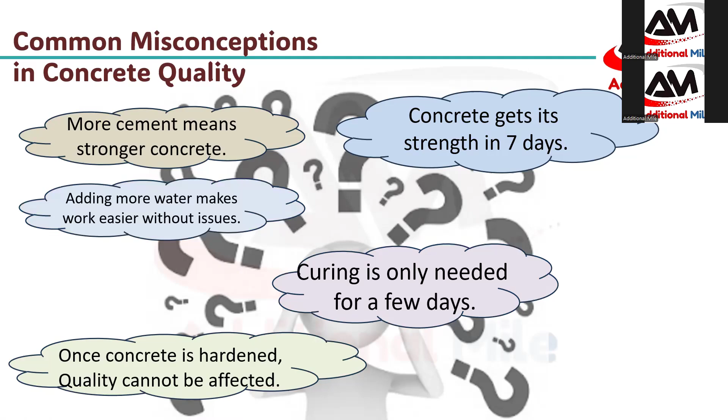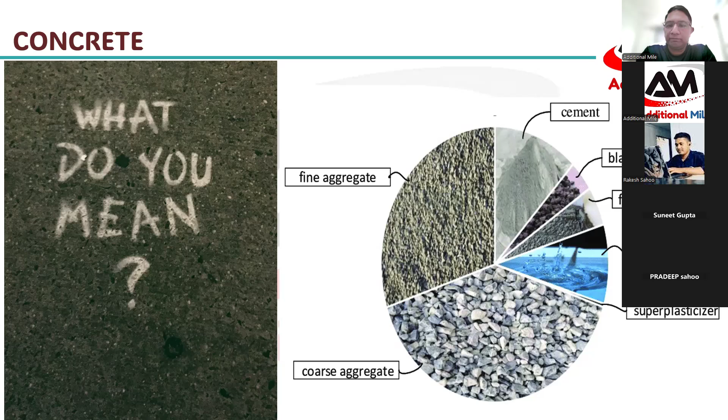So, before starting our regular presentation, let us have a very quick question session. Like, what is concrete, or what do you know? What is concrete, can anyone tell? Let us make this session as interactive as possible, so that there will be knowledge sharing as well as many things even we can learn by ourselves. So can anyone quickly confirm, just quickly, quick answers, question answers - what do you mean by concrete? Suneet, Pradeep, yeah - mix of all the ingredients, what has been shown on the picture. Okay, okay, other than that - because as the subject says, quality of concrete beyond mix design and cube testing, right? So let us understand beyond the box, out of the box - what do you understand by, what do you mean by concrete?

Mr. Rakesh, are you there? Pradeep? I could hear only Suneet.

Material which gives you toughness, hardness, strength in the structure.

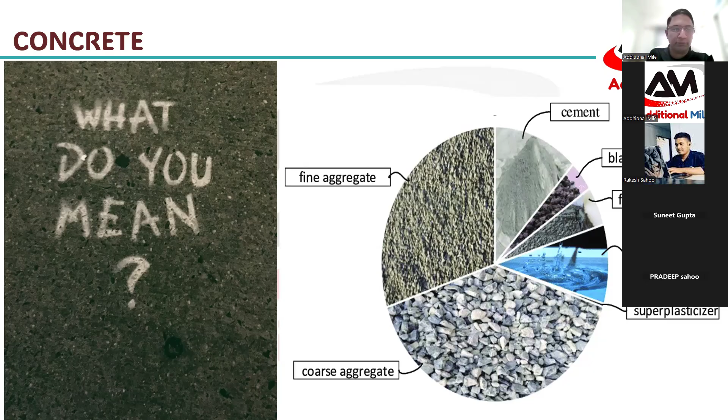As per my opinion, concrete is nothing but a heterogeneous mix of various ingredients which is designed for durability, strength, to achieve specific shape and designed purpose. Is that sounds logical?

Correct. So concrete is nothing but a heterogeneous mixture of various ingredients, which is designed for durability, strength, and to achieve the specific shape and purpose of the designer.

As for this, is there any other questions you want to ask, or shall we move ahead? I think we can keep the questions in the end, sir. No, questions in the end is very easy, but I want all people to interact, because I know it's a Saturday and many people will have their own assignments to do, or many are on site. So I just don't want them to join the Zoom and keep it aside. That's my intention. Anyway, the last 10-15 minutes will be a question session.

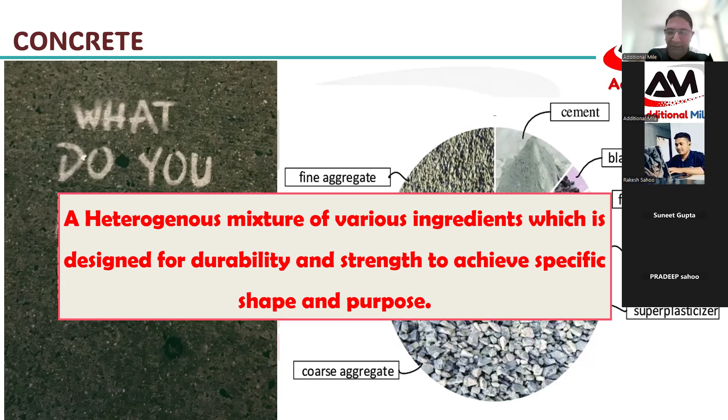Okay, fine. So let us go to the next chart. Common misconceptions in concrete quality. So what are the common misconceptions in concrete quality?

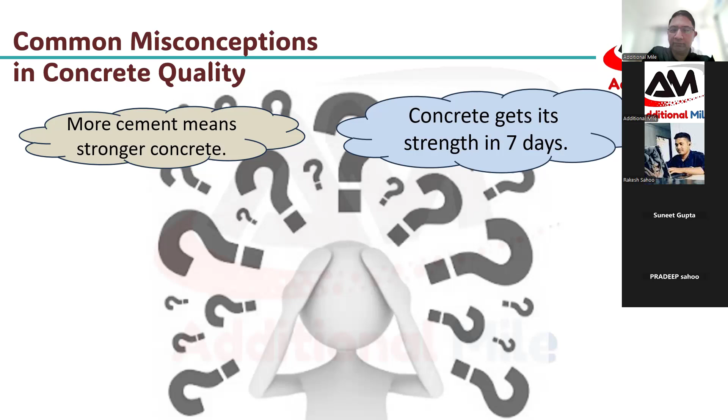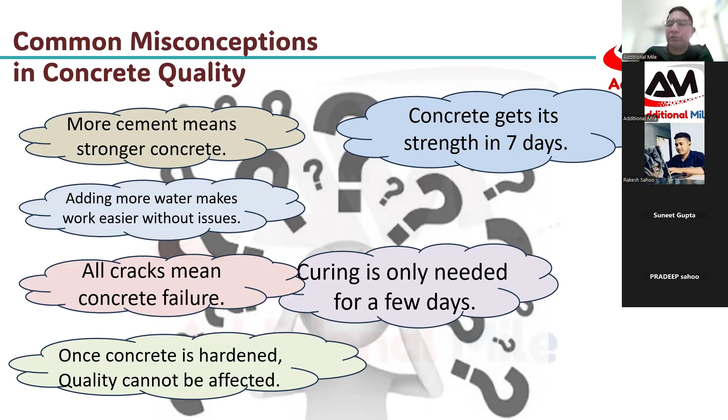One, more cement means stronger concrete. Concrete gets its strength in 7 days. Once concrete is hardened, it cannot be affected. Curing is only needed for a few days, not more than that. Adding more water makes workability easier. All cracks mean concrete failure - any kind of cracks, people by default conclude there is a failure in concrete. All structures need the same type of formwork. And last, strength equals durability. These are the common misconceptions in a project, generally management things.

But is it true? Is it true? Now let us go one by one.

Concrete strength depends on the correct proportion of cement, water, and its ingredients. If excess cement increases, that will directly result in shrinkage. It almost generates high heat of hydration and may cause cracks. Now, may cause cracks means it all depends upon other factors.

And also many times we see the high cement content will reduce the durability of the concrete. Durability means long-term performance of the concrete.

Same way, another misconception is that concrete gets its strength in 7 days. Concrete reaches about 60 to 70% of its potential strength in 7 days, not 100%, as per practical results.

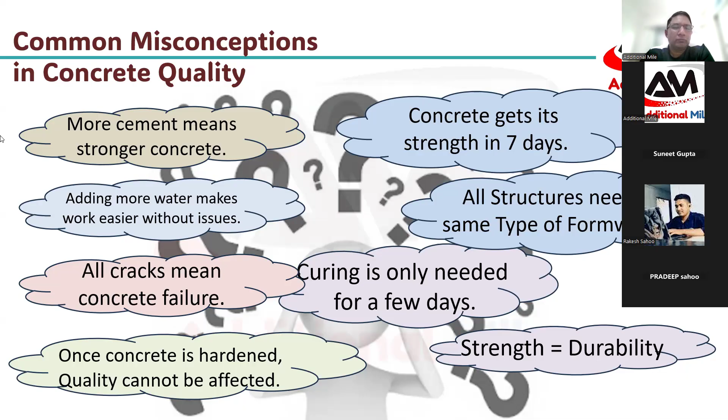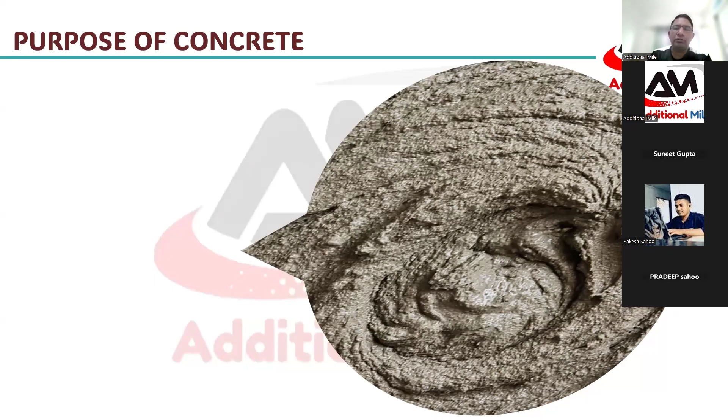Breaking down this purpose further: structural support, obviously, because it has to support the structures that are going to load on it, like column, beam, slab, foundation - that is anyway there. Or other things kept on it, for example tanks, water tanks, fluid tanks - in petrochemical plants there are huge tanks kept on it. That is structural support. Next is durability and longevity - if you want to protect anything from chemicals, weather, fire, dampness, or water, it is designed for that.

Then the next purpose, fire. Concrete is inherently fire resistant, maintaining its structural integrity at high temperature. We frequently use concrete liners, like in boilers. You might have seen steel structures carrying hot or cold fluid, what we call freeze and thaw. To avoid direct thermal attack, they construct a concrete barrier around them. Then the basic concept getting more popular nowadays is called sustainability.

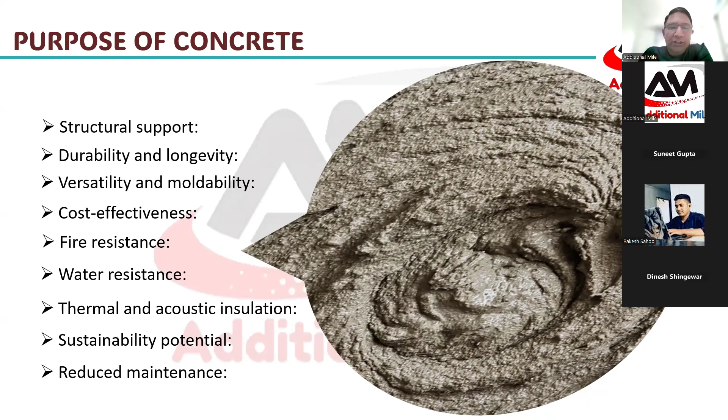Then comes how concrete behaves. Concrete behavior is not only depending on mix proportion, but there are multiple factors, such as shape. Shape also affects, for example, if there are sharp edges, they are often exposed to damage at the edges or damage to the shape. So shape of the concrete, even if you see in dams or a bridge on the river, will have different shapes of pier or columns. Same way, the shapes of concrete differ as per their usage.

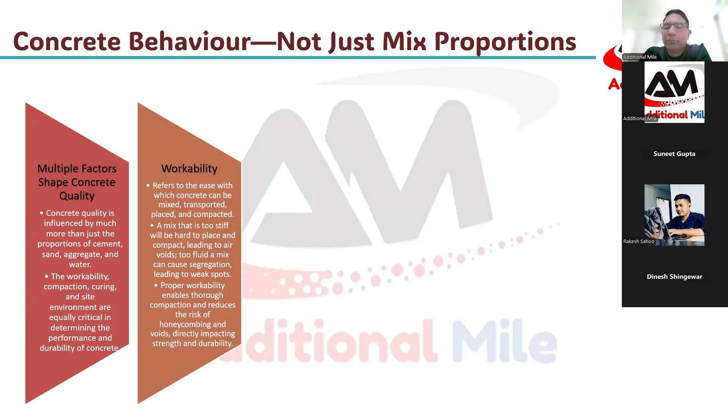Next is workability. You cannot use the same slump for all concretes. You have to use less slump for foundations, a flowable concrete for confined spaces, and a moderate slump or workability for slabs and beams. So workability also influences the behavior of the concrete. Then compaction, the percentage of compaction, the type of compaction. Inadequate compaction always leaves air voids, and once we open the shutter we come to know there are honeycombs due to poor compaction, or high compaction or over compaction also leads to segregation of the aggregate from the slurry.

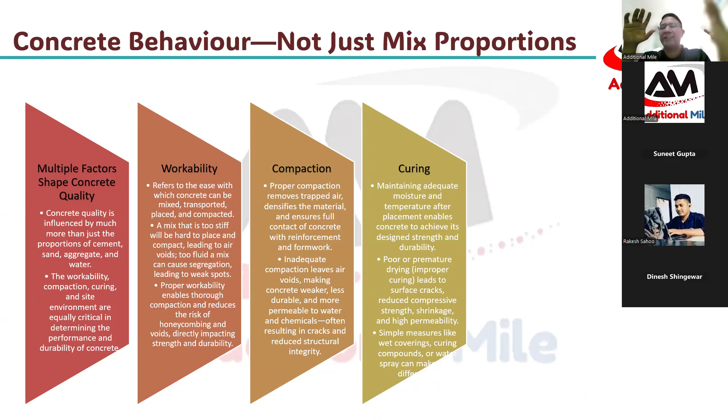Next comes curing. As I told you earlier, poor curing or poor methods of curing also affects the concrete. For example, if on-time curing is not ensured, it will affect it. Or if you cure only certain faces and leave the backside or a side face inaccessible and uncured, that also affects the concrete to some extent.

Next is site environment. This means too much windy, too much humid areas like Mumbai or Chennai, or hot weather like Rajasthan, Kota. I spent my early career in Kota, where the ambient temperature goes up to 50 degrees. I also had a chance to work in Mangalore, where the humidity touches up to 90%. In Mumbai and Chennai, the humidity level goes up to 94, 95%. I don't know how many people here are from Mumbai, except I think Dinesh. He's from Mumbai. So the humid temperature, hot temperature, and cold weather all affect the concrete behavior.

And last but not the least, a perfect mix can also fail. How come you say that? A perfect mix can also fail. As I told you, it is not only about the mix proportion, it is also about bad practices, human intervention, and human error.

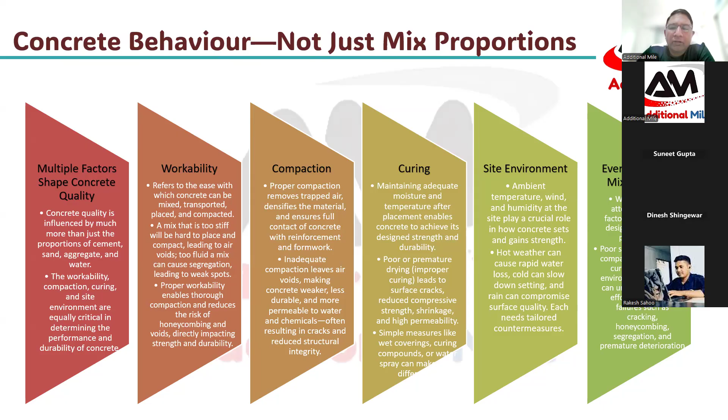Regarding this wax base and water base, we have done lots of assessment on our project. What we observed is that with wax base curing compound, while doing finishing activity, you need to strike off the layer before finishing. That is one of the most challenges we have faced.

So we have gone for the water base. In water base, you do not need to strike off the layer, as I explained, it will start removing or peeling off after 10-15 days. So by my side, it is advisable to go for water base always.

It can save one of the activities. If your structure has a coating above it, you don't have to go with wax base, because wax base is always difficult to remove or peel. Water base is always recommended for structures which have a coating above it.

But for underground structures like plinth beams, which don't need any coating above, you can go ahead with wax base there, because there is always moisture available underground which will affect the surface of the concrete. We don't know what kind of moisture it is - it may have chemicals or sulfates which will affect the concrete surface. So wax base will have additional protection on the concrete.

Generally it is common practice nowadays. In one of my projects, we had gone with a bituminous coating - forget about the curing compound - we directly did a bituminous coating to avoid any interaction between soil and the underground structure. So wax base is one of the common and affordable ways to go.

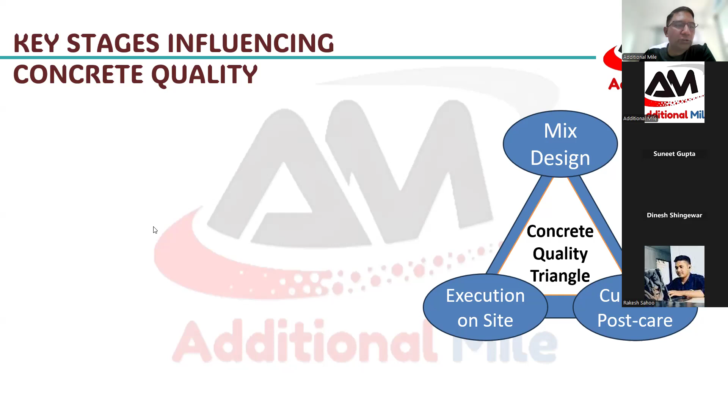Let us come back to the topic where we were. The internal factors affecting concrete behavior or influencing concrete quality is material selection. As we know, any wrong selection of raw material will affect the concrete mix. Then comes mixing - batching and mixing.

We all know there are two types of mixers available in the market, and a third is manual mixing. The two types of mixers are drum mixing and batch mixing. Drum mixing is where the drum rotates vertically, and batch mix is where the drum rotates horizontally. Though the mixing pattern looks the same, there are pros and cons in every kind of mix.

So it is always suggested to go with batch mix. Why? Batch mix always resembles manual mixing. I'm using this comparison because, though it's an old tradition in India which we don't recommend nowadays, manual mixing was a controlled mixing ensured by a supervisor or engineer standing there, witnessing and supervising it.

So horizontal mixing or batch mixing always resembles horizontal manual mixing, and that is why we always ensure a horizontal mix is always a better mix compared to vertical.

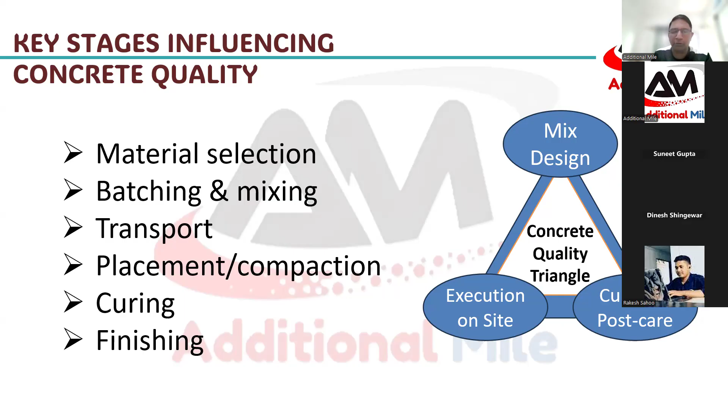Regarding this finishing and compaction - a floater is recommended for finishing and compaction. How well is it? A floater is always recommended for flat surfaces. It doesn't vibrate or pull the slurry up - it only takes the surface slurry or surface material for its finishing.

No, why I'm asking is because we were discussing the floater with our contractor, since we are getting too many cracks on the surface of a recently cast slab.

To avoid shrinkage cracks that come on recent slabs, we were discussing procuring a floater machine. Nowadays you can get floater dia from 450 to 600mm, minimum dia, so it can go into the smallest area you can capture, along with the smallest dia.

We were discussing that the challenge is the floater has to be used after some time of finishing, once the concrete sets, I guess after 30 to 45 minutes. At least 2 to 3 hours for the surface to get a little bit floatable and harden, and only after that we can use the floater.

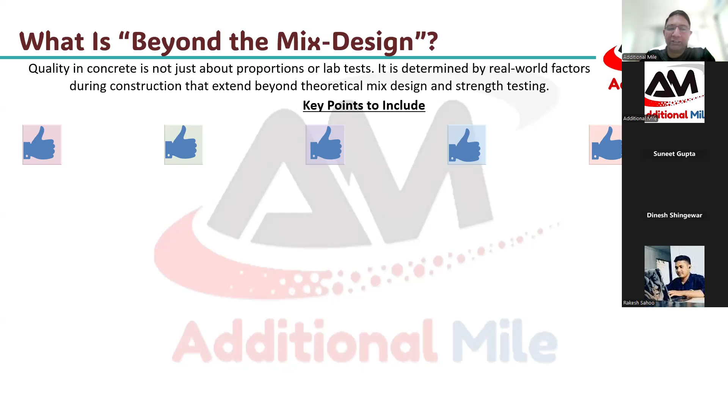As we discussed, concrete has its own behavior, which other factors are influencing. We also discussed the workmanship, the minor mistakes or minor challenges or minor negligencies which can also affect the concrete quality.

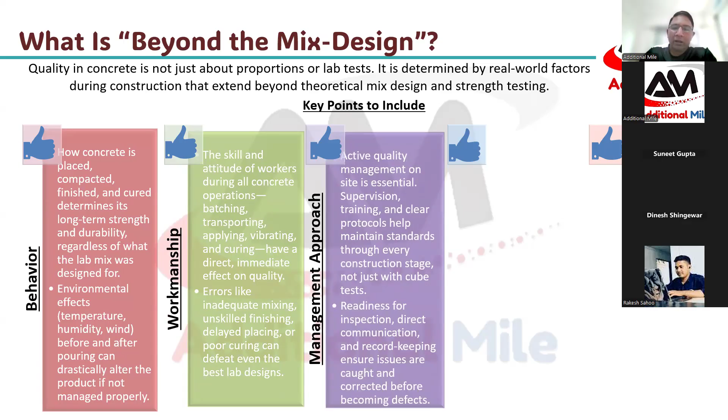Here comes the catch, the management approach. When it comes to a management approach, how serious is your management towards maintaining the quality? When I say management, it starts from a supervisor, not only an MD or a CEO of the company. It starts from the supervisor.

So quality management is as essential as project management. Proper supervision, proper training, and proper method statement, maintaining the standards at every stage. Not just, 'I produced it, I sent it, my job is done.' No, it's not like that.

After producing, even this applies to RMCs also. RMC's duty is not just producing and sending the concrete. It is always to take end-to-end responsibility of the concrete. I have produced it, it is my responsibility to check whether the client is also maintaining the quality for pouring. Otherwise, there is no use of my production, my efforts for concrete production.

Okay, then I will produce the concrete, but what about readiness? Is the structure ready for receiving the concrete? In my experience, I have seen so many projects where my CM or PM used to call me and say, send the concrete, don't worry about whether it is ready or not. That should not be the approach, right? You should be 100% ready to receive the concrete.

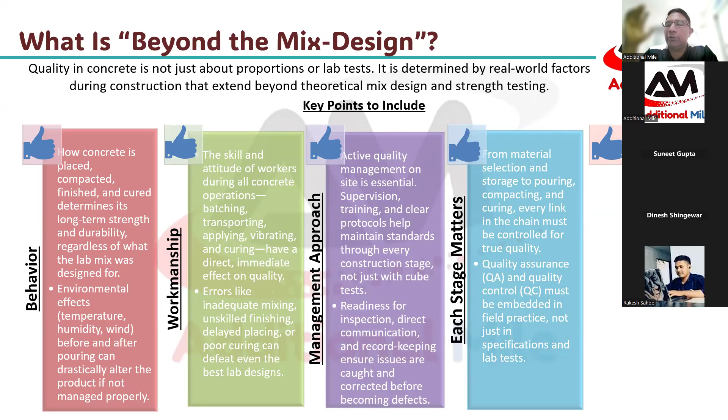The good quality control engineer should be awake at site to keep checking from the day of mixing, day of reinforcement, day of formwork, till the 28 days of the concrete is over. Even after that it matters with other factors, but standard factor says 28 days is our baby's incubation period. We should take care with all kinds of care.

And last is the very common problems - keep surveillance on cracks, honeycombing, scaling, weak spots. Weak spots - one of the ITC projects in Mumbai, I was called by... I was working in BKC, and exactly opposite to that there was an ITC hotel project going on, and I was called by the site engineer there at that time to just check the problem.

The column was not set for 3 days, even after opening the shutter. The finger was making a fingerprint, a finger punch point inside. And when we went into the curing tank, the cubes had almost vanished, washed out due to a mixing issue or whatever the reason was. We came to know the reason later, but at first it was very difficult to investigate why the concrete was not set. If someone had neglected it or not notified it on time, we could have ended up in a disaster.

So for such kind of things, we must have proper vigilance. As I told you, the incubation period is 28 days till handover.

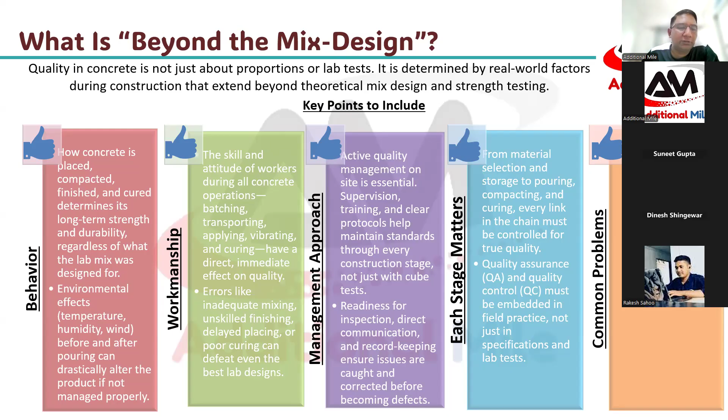Now, what are the common field problems? These are, as I told you, part of a holistic approach. Now we will go into common field problems. We see cracking,

segregation, where the material separates due to excess water, maybe, okay, sometimes a very high height drop, mishandling in the sense someone has added water, someone has done excess vibration. Sometimes I see people do heavy vibration in slab work also. Come on, a slab is hardly 150 to 200 or 250 thick, you don't need heavy vibration there. But still people do heavy vibration just to ensure a factor of safety. So we should refrain from such things, because the more you vibrate, the aggregate will settle down and slurry will wash away. That is also a part of segregation.

Honeycombing, obviously, as I mentioned, is due to low vibration or improper formwork filling. The gaps in the formwork, most of the time we reuse the form plates or formwork sheets, and we always forget to plug the tie rod holes, which allows the slurry to go out and honeycomb happens. Sometimes with excessive vibration, slurry goes to one side and aggregate settles on the other side.

Scaling and spalling, as I told you, happen due to excessive tamping and finishing on the floor. After some days we can see surface peeling, or we always call it flaking. Or sometimes in very hot regions, concrete sets very fast before even doing proper vibration. So those lumps remain there, and once the load comes on, it gets cracked.

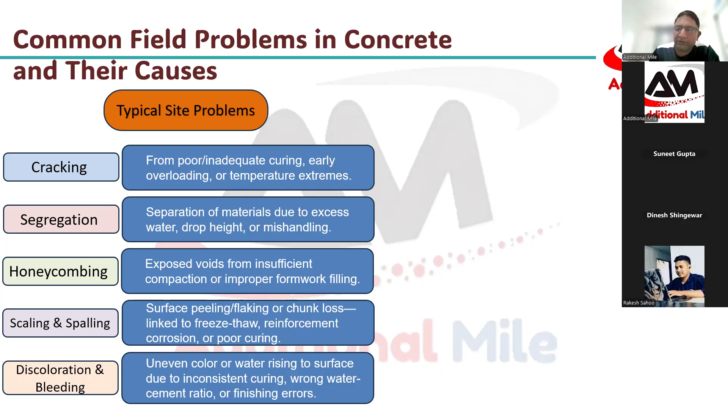So for all these areas, what root causes do we observe? Improper curing, poor compaction, and some mix issues. Mix issues in the sense, as I told you, aggregates are from different sources, cements are from different sources, or, as we just discussed, different types of admixtures and different types of curing compounds are used.

Sometimes, I'll tell you, a wax based curing compound was what I was recommending to one of my clients, and the client was unfortunately a bit financially or budget oriented. He used a water based curing compound, and he added water to it, and he diluted it.

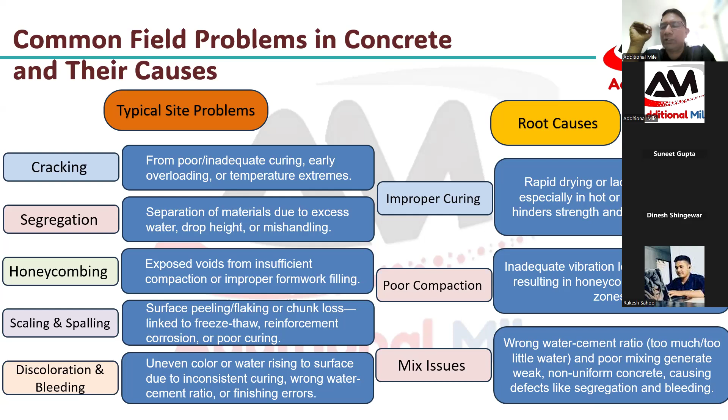He diluted the curing compound and applied it. Obviously it will not work, and it stopped performing. After a few days, he could see the entire curing compound had washed away. To save money, he diluted the water and started doing manual watering instead. See the negligence of this person. This kind of thing we should avoid.

Now, what are the interventions in quality? Intervention is an unwanted interference in the concrete quality. I see some people have joined recently. Can you put light? What is your opinion on what are the interferences or interventions in concrete quality? What do you understand by interference or interventions in concrete quality? Anyone?

Don't worry, we are on time. So...

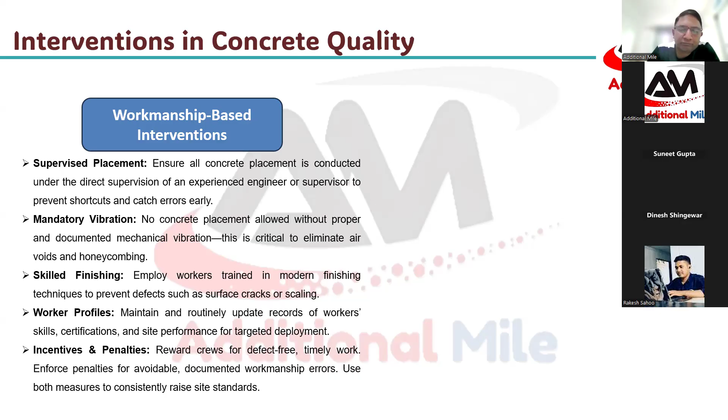Nowadays ICI and ACI India chapters and others are awarding best concrete projects and best concrete structures. Recently, Bangalore International Airport bagged the best concrete structure award from ICI. These rewards and recognitions matter a lot. When you get such small awards or recognitions from external agencies, you feel overwhelmed and energetic, and you perform better. So you should always intervene before things go wrong.

Next is management based intervention, where senior management interferes to improve the quality. What are the management improvement interventions here? Develop a proper PQP, project quality plan, and a proper pour plan - where to start, when to end, what should be the rate of pour, what should be the mixing ratio, how much deviation is allowed in transit time, and how to mitigate harsh weather.

The last and very important thing is culture of quality. The management should introduce the culture of quality - not only on paper. They should bring training sessions and trainers from outside.

I have recently given training in around 5 to 6 projects, and they were very happy. It was not because of my efforts, but because of their own management's interest to educate their workers, engineers, and supervisors towards quality. Everyone knows how the cube is cast, but very few know why the cube is cast. That gives clear information and seriousness about what quality is and why it's so important.

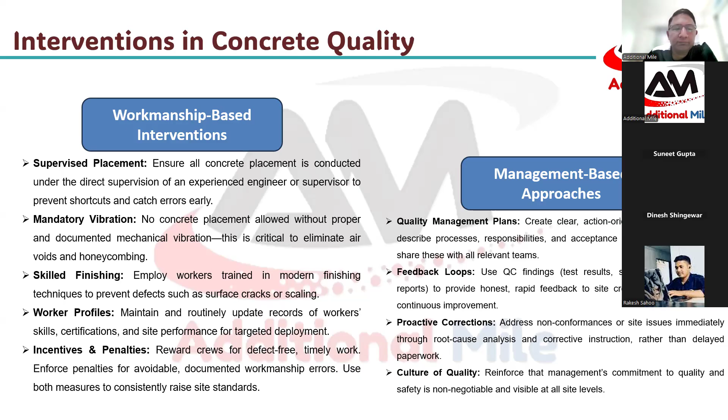So far so good, I believe. Now we have understood how the approach should be. But what is the roadmap? How can it be achieved?

One is proactive approach. What are the proactive approaches? Check the concrete before pouring - a pre-concrete checklist, like plumb and everything. Then when the concrete is done, proactively go yourself and check for any cracks, voids, honeycombing, or segregation. This is proactive work by the concrete supervisors or formwork team.

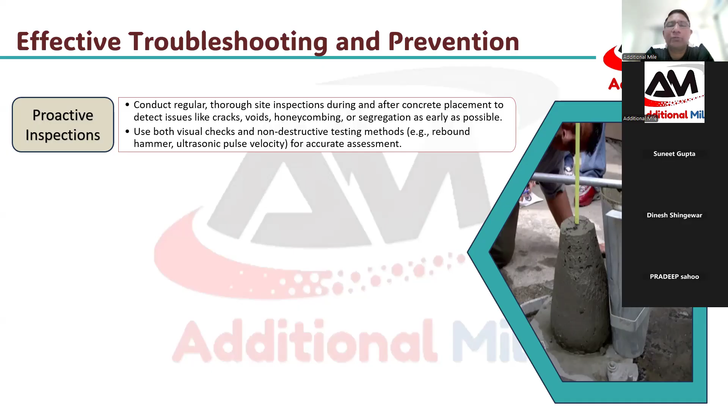Early identification means identifying issues before someone else raises the red flag. You should set your own timeline and inspection period - the moment de-shuttering happens, I should be there. The moment someone unwraps the Hessian cloth after curing, I should be there to check. That kind of early identification.

Swift action: the moment you see honeycombing, I don't recommend immediate repair, but address the issues with proper consultation with experts. As we all know, there are three types of honeycombs - major, minor, and severe.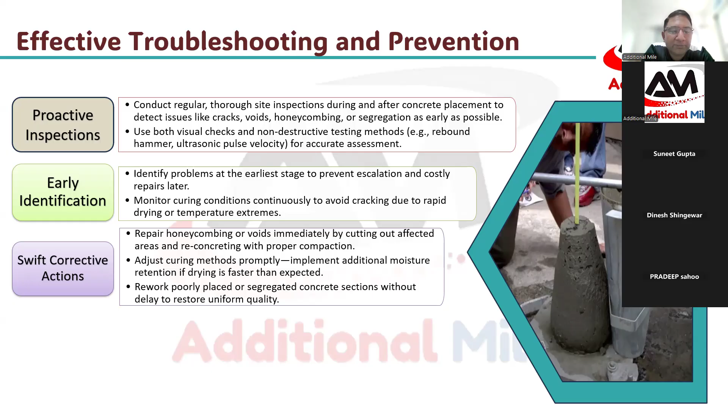Record what all you have found, record all the corrections you have done, record the conformities and non-conformities, and record the trainings you have undergone on specialized activities. This will help you do a lessons learned session at the end of the project, which will also help the next generation or next team identify and have control at early stages.

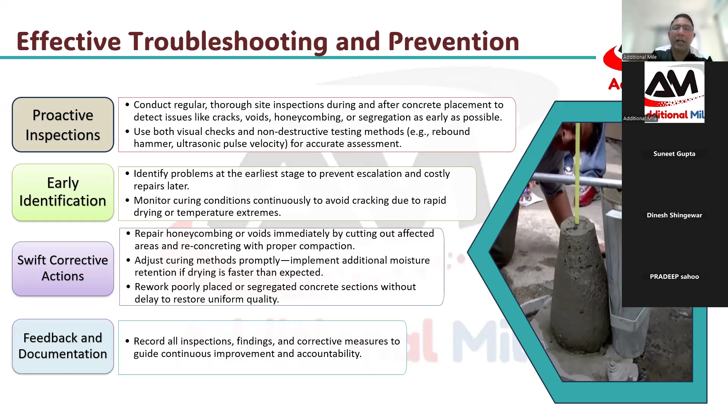Now let us come to the part where we left earlier, which I think I have already explained: strength versus durability. What is the difference between durability and strength? In the first slide itself I addressed this, but for the new joinees I'll reiterate. Concrete strength is not directly durability. Concrete durability is not strength. Strength is a part of durability.

Durability always has factors such as freeze-thaw cycle, temperature, chemical attacks, sulfate attacks, carbonation - these are all factors. So concrete strength is not directly durability. As I told you, this is a misconception - please come out of it.

For decades, people assumed that high strength automatically means durable concrete, which is not the fact. In fact, many researchers and even writers like Adam Neville and M.S. Shetty have clearly stated that cube strength does not guarantee resistance to real site exposures with chemicals or temperature - two different things.

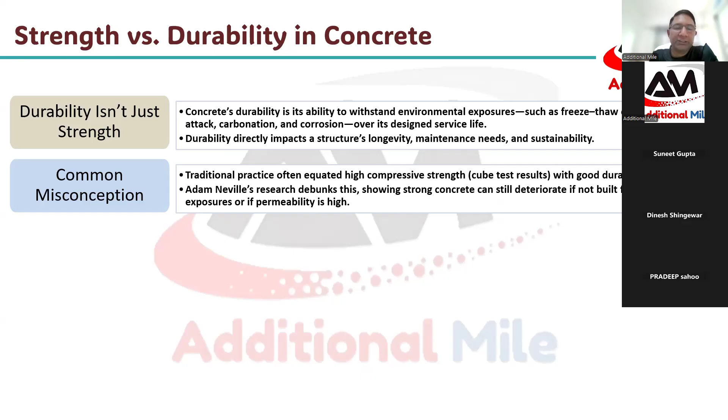Role of water in water cement ratio. As I explained, there's a question about reusing water and also the quality of water. As I told you, once you use and recycle the water, that will have certain carbonations or certain ground chemicals which may be harmful for the concrete. So we should refrain from selecting untreated water.

If you have restrictions to use groundwater, please get it tested with proper IS code for construction water for concrete structures. That test is already available at the NABL labs. Please get it tested for water suitability for concrete structures or usage in concrete.

Then, exposure based on design. No shirt will fit for all - you should always select the shirt which fits you. Same way, one concrete mix design will not fit everywhere in all aspects, so we have to design with the exposure quality.

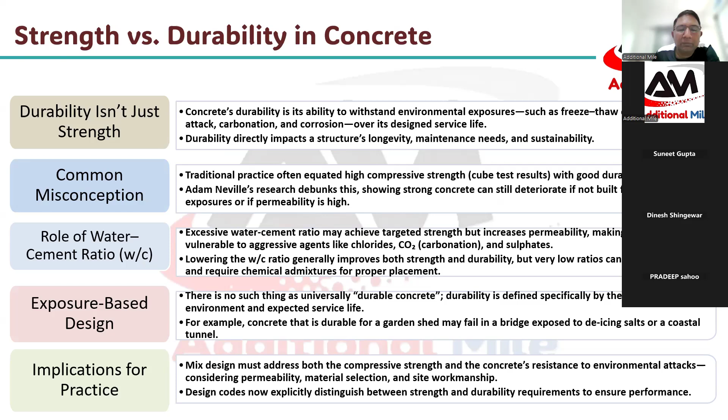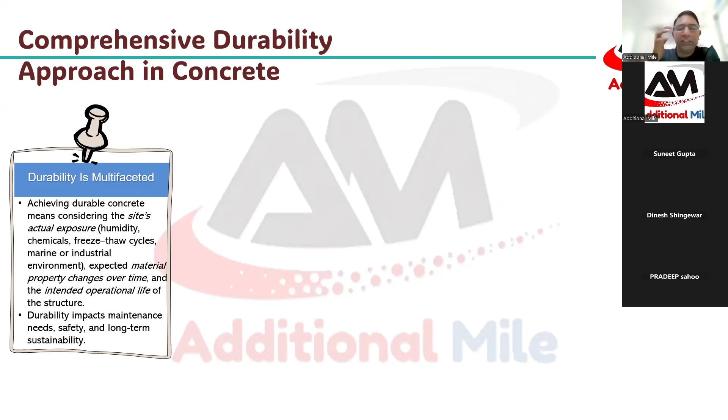Next, durability approach. Nowadays there is so much talk happening around durability and sustainability. Let us quickly go through what this durability approach in concrete means. As I explained, concrete should be designed considering parameters like temperature, climatic parameters, geographical parameters - whether you're constructing near an industry, in hilly areas with cold climatic weather, or in a humid area - that matters.

Then, mix design to match the real exposure. As I told you, the structural design as well as the concrete mix design should ensure suitability for conditions like coastal weather or aggressive industrial chemicals.

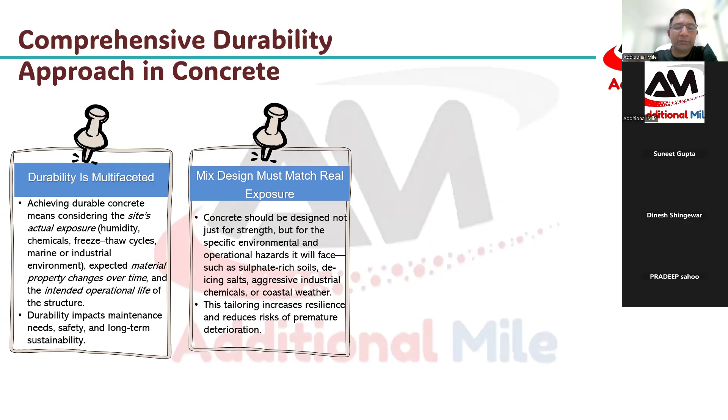Supplementary cementitious materials like fly ash, GGBS, silica fume will ensure resistance of the concrete towards sulfate. Most of the time GGBS is considered the best sulfate resistant material, whereas fly ash is recommended for reducing permeability in concrete. It is such a fine material that it avoids unnecessary or forced water entry into the concrete, making the concrete very controlled and less permeable.

And last is improving the resistance to sulfate and chemical attack. As I told you, introducing this kind of additives will reduce the permeability of the concrete, right?

Using SCM. Now what is this SCM? As I explained earlier, it is supplementary cementitious materials like fly ash, GGBS. They are very powerful tools because they are finer than the cement, which will go and plug the concrete pores inside, controlling the permeability, which will improve the resistance to sulfate and chemical attack - essential in industrial areas and sulfate-prone underground structures.

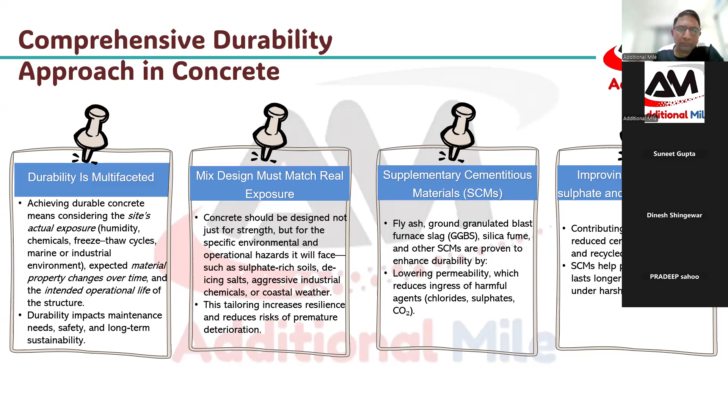So far so good, I believe. Parallelly, there is a huge word nowadays going around - sustainability, in addition to durability. Now what is sustainability?

As we discussed, using recycled material. But it is not only using recycled material, it is also using low lead time, or low lead duration or distance for shifting materials. As per LEED sustainability rules or policy, recently the Bangalore International Airport has bagged platinum status in sustainable and LEED green initiative. Platinum is the highest award given for sustainable materials used in a construction.

So I'm working with Bangalore International Airport. The airport is recently awarded platinum certification. Platinum in the sense, the primary rule is that any material we are importing or shifting should be within 350 kilometers from the project area. Plus, you should ensure the maximum material, almost every material or every part of the structure, should be used for recycled content.

Then what makes concrete not green or non-sustainable? Because the cement itself emits 8% of global CO2 emission, which is very high. And that is how the green initiative has come in, and they are planning alternatives to cement, or reducing the cement content by adding waste materials.

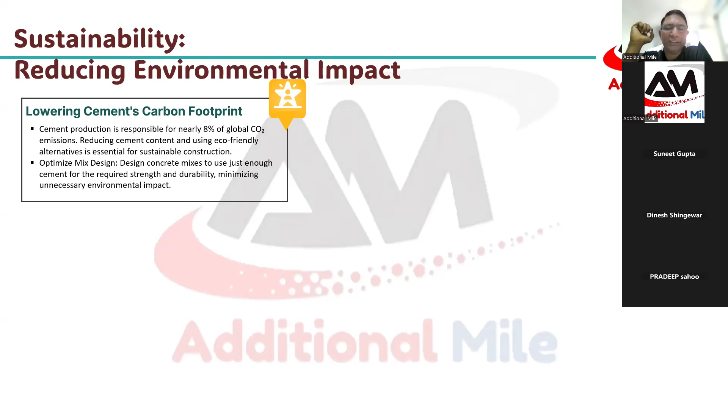Other alternative is geopolymers. Geopolymers use byproducts instead of Portland cement.

So you might have heard about EcoDrain. That is a company which has come out with manufacturing ready-made drains, small surface drains. They use geopolymer concrete, which gives a mirror finish, molded concrete, and surface to match any kind of shape you want. Near Bangalore, there is a place called Hosur, where Alto Precast is there. They use geopolymer concrete for manufacturing crash barriers for roads or any kind of barriers designed by government or local road government - in this case, the Tamil Nadu government.

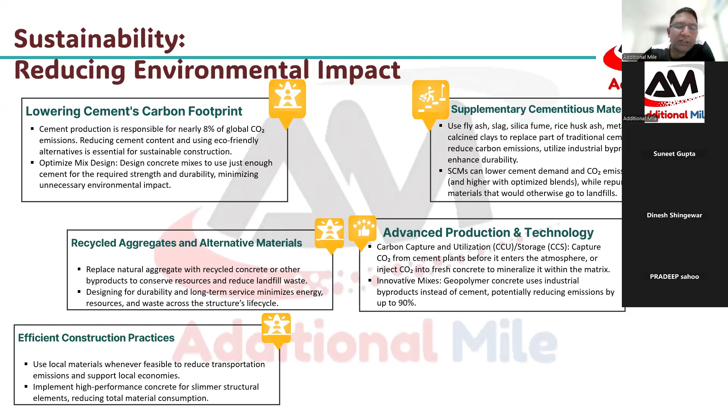So the government is also putting interest in using these geopolymers, which right now is a man-made product, man-made chemical, with low cement - almost zero cement, just as a binder content, no strength requirement from it. Plus we are not depending on natural resources that will get over soon, or any quarry or something. So there is no fear of raising the price due to shortage in the market. But yes, it has to be designed carefully because it is a man-designed product, suitably designed for a specific intent.

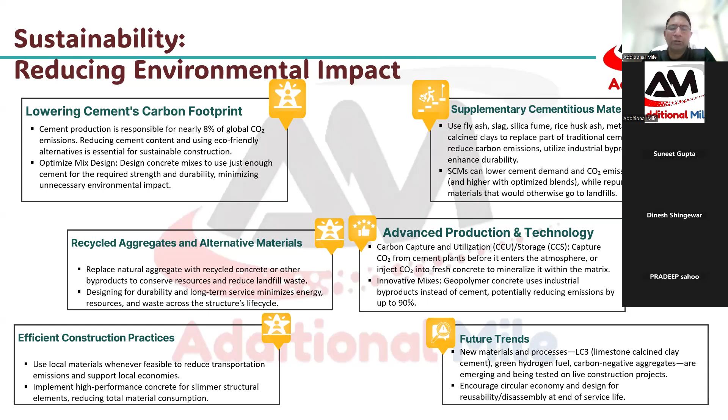As we know, this SCM - supplementary cementitious material - can be replaced up to 20 to 30% of cement content, whereas geopolymers contribute 90% replacement of cement nowadays. And recently, in the fifth revision, they have allowed 40% to 50% GGBS in PQC or cement structures used for infra works. That is also a good initiative by government to reduce cement content.

Everything we are discussing today is related to workmanship or a proactive approach towards reducing our efforts. Now, how to do prevention over repair? Before repair only, we should prevent the happenings. What can we do? We can ensure early inspection so that the concrete is not set fully. So any kind of repair, the bonding will be ensured. Otherwise, once the concrete gets hard, it is very difficult and costly affair to break.

Safety audit before handing over, safety audit before concrete placing on a slab. Please do the proper inspection of each and every staging, scaffolding, to avoid any kind of mishaps. Recently, there have been Instagram or YouTube videos where the concrete failed when people were standing and pouring concrete on a slab. So we should early detect and inspect the staging and scaffolding from an expert point of view, not by yourself. The designer should come and check whether everything is okay as per design. Then you should pour the concrete.

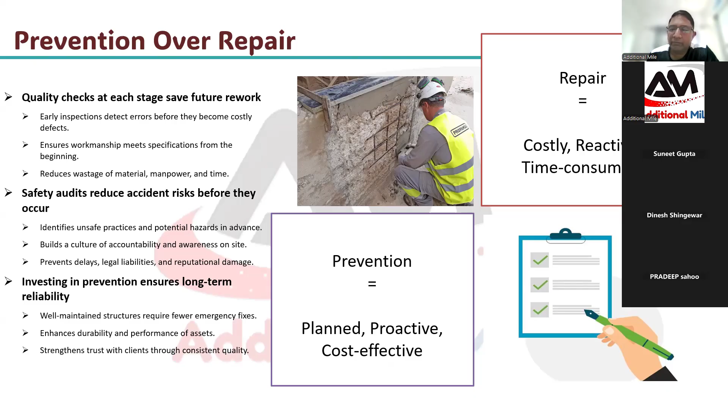So what are the takeaways? Quality of concrete is more than a mix design, because even the best designed mix will fail if workmanship and site practices are poor. Embrace technology and training: use sophisticated tools like digital QC systems, ensure proper inspection, and keep your workforce trained on best practices and skills.

Third, make quality everyone's baby, meaning everyone should own it. If your construction manager or supervisor is checking the pour, he should not rush for concrete. He should also take ownership of the concrete as if it were his own proprietary material. So the liability lies from engineers, managers, CEOs, owners, all the way down to the workers.

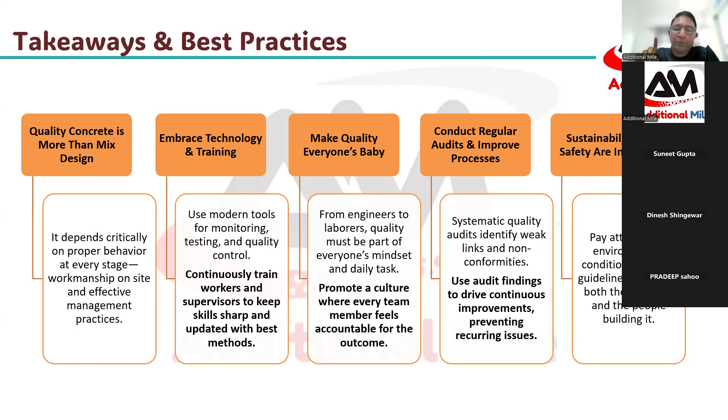And remember, concrete does not forgive mistakes. It only hides until it comes on the surface. Our role is to prevent issues before they demand repair. Now to the last slide.

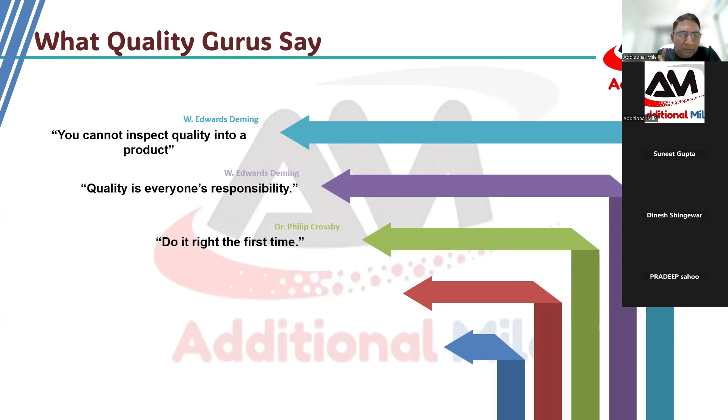Let us go through some keywords by our quality gurus. Mr. Edwards Deming, please read his books and his 14 principles. They are excellent. He always says, you cannot inspect quality into a product. It is an overall system. Quality is everyone's responsibility. Again, Sir Edwards Deming. Philip Crosby: do it right the first time. There is no second time.

The bitterness of poor quality remains long after the sweetness of low price or early time is forgotten. No one will remember who built it. No one will remember how fast they built it. Everyone will see and remember the present condition of the structure or element, and how good it was built.

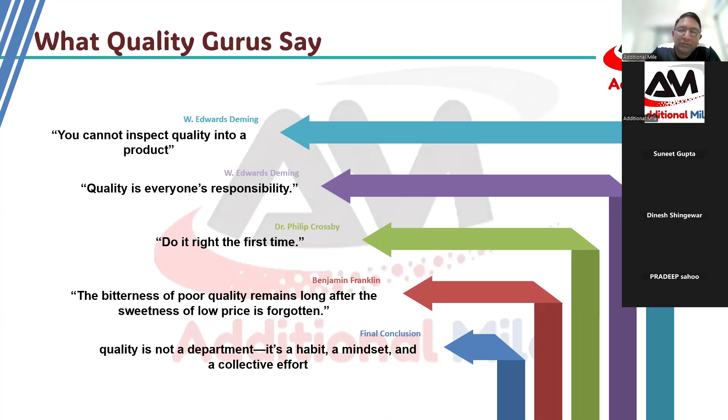This is a final conclusion, which is my personal opinion. Quality is not a department, it's a habit, it's a mindset, and a collective effort towards accomplishment of a successful project.

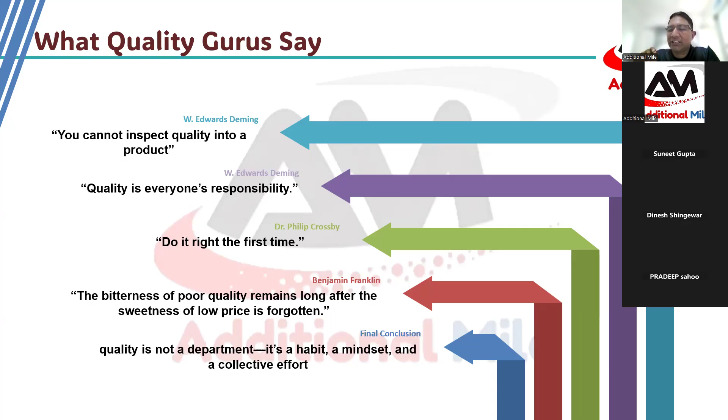By this, I always end my webinar with this quote: attitude is everything. I hope some of the team members have attended my earlier webinar on attitude, power of attitude. So it is all the same thing. Attitude is everything. If your attitude is there, your dedication will come, your acceptance to the work will come, and ownership will come. This is how we will end up today's webinar.